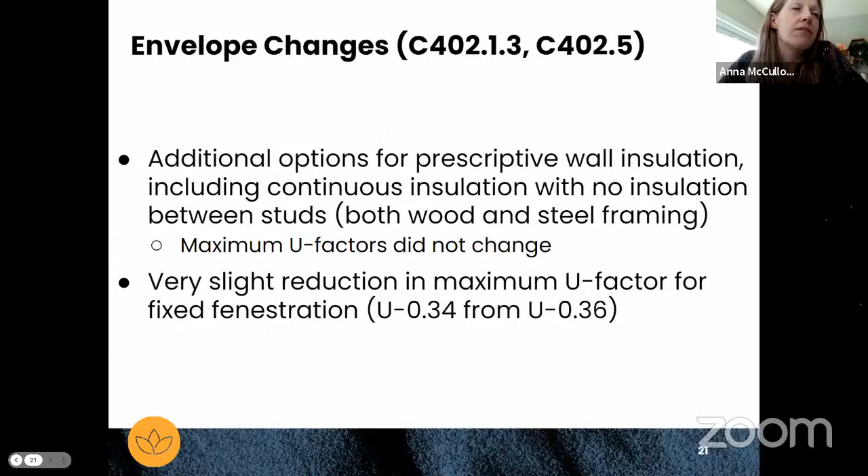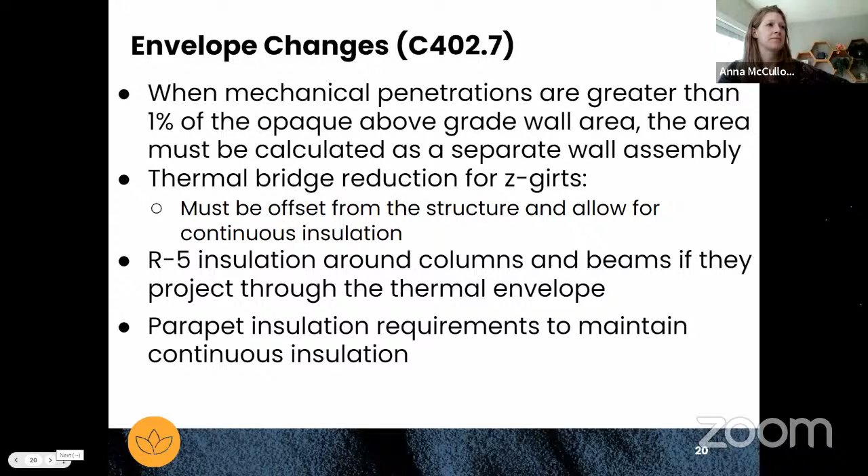We got a question in the chat: would the 1% be calculated on just the individual wall area or the entire exterior wall area of all floors? It is the entire exterior envelope, so roof, walls, floors. Yeah, just clarifying, making sure I'm understanding correctly, air leakage testing, i.e. a blower door test, is going to be required for commercial buildings. Yes.

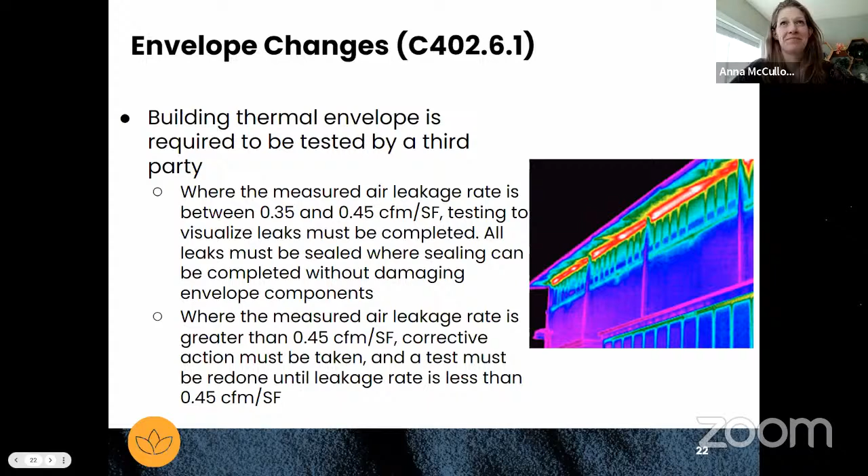Okay, thank you. That was what I had, oh, there is one more. If we have a balcony or floor deck that penetrates the thermal envelope, in some cases we'll see that the concrete floor deck just penetrates right on through the thermal envelope, with no attempts to mitigate that thermal bridge. That is not allowed to happen unless an approved thermal break device of at least R10 is installed. That'll be an increased cost to try and really reduce that large thermal bridge.

Okay, that was what I had on envelope. Is there anything else you guys wanted, any concerns you had? I don't know if anybody's read through the 2024. Okay, we'll keep moving. Oh, Tim.

Yeah, thank you. We see this quite often with podium or concrete podium type construction, and I think that's why this is finally making it into the code. But I've yet to see a detail to do that thermal break through there, so I think the designers are going to go through an area weighted U factor. I would be interested in this meeting to have somebody send me an example of that, which would be helpful for me with my plan review.

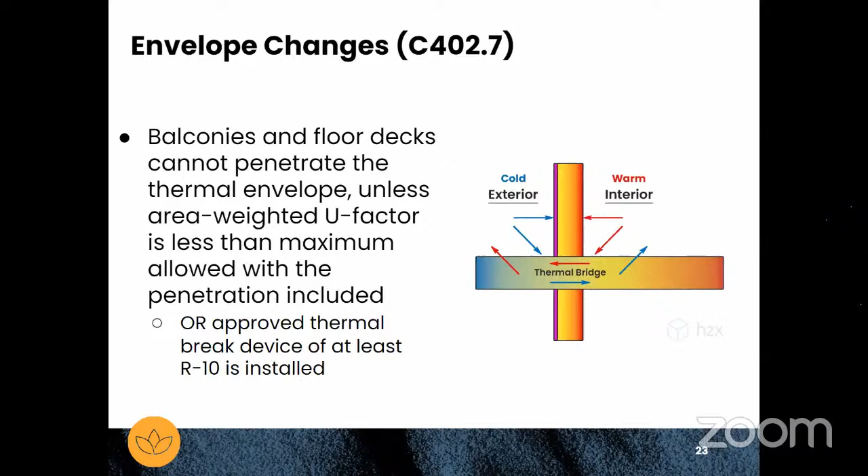Yeah, I did. Are any of these, just kind of knowing my experience with the residential code, envelope measures tend to be among the most contentious. Are any of these elements still contentious, or are these what are still holding up the commercial code from moving from draft to final form? I guess what I'm trying to determine is which of these are still points of contention within the commercial code, so we can figure out which ones we need to maybe pay close attention to before the code becomes finalized.

Yeah, so go ahead Adam, if you have any additional information about this. My understanding is that the appeals are really centered around section C406 for the most part, and that if the building does not have heat pump heating, there are additional points that are required to show compliance with section C406.

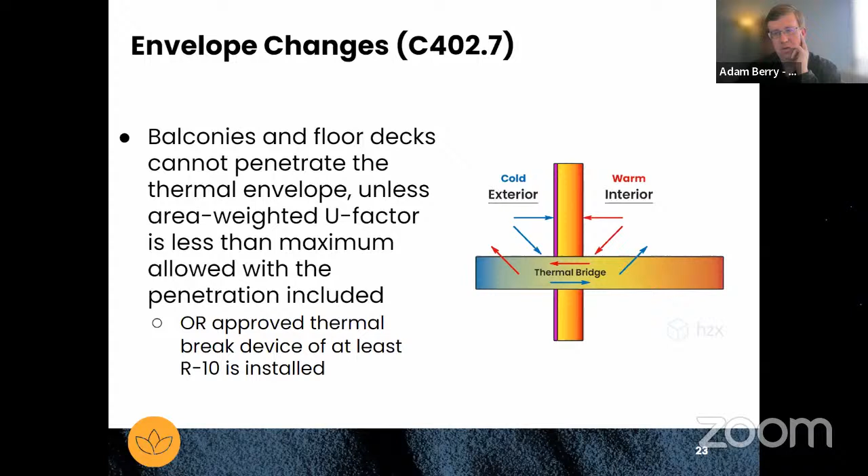Yeah, so that was one of the big ones. The other big one for the appeals was about the readiness provisions that the ICC included in the base code, which I think are not particularly relevant here, given that we already have many of these readiness provisions in our own model code that you all created last year. But I think that was the other big point of contention.

Great. And then Ron, did you have a question?

Oh, I was just going to mention that there are some proprietary products out there that deal specifically with this thermal break issue for concretes. Yeah, I could put one in the chat. Oh, great. Thanks, Ron.

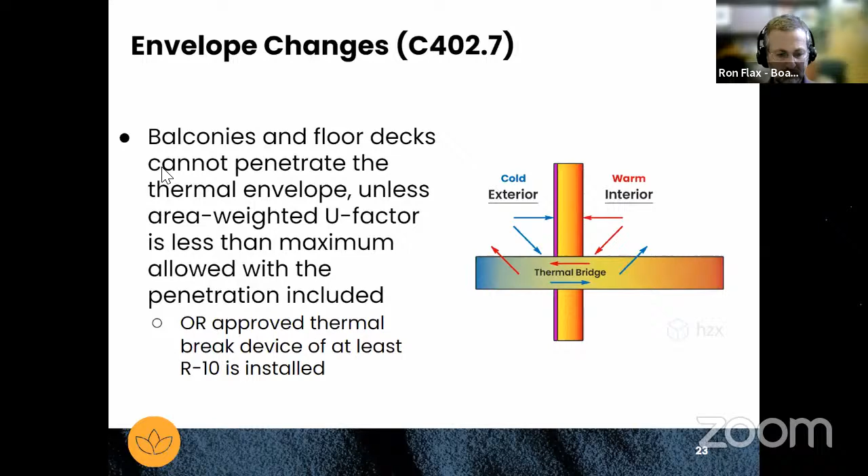HVAC didn't have as many changes as I expected, so that's great. There is now an option to show compliance with section C403, the HVAC section, using the total system performance ratio. This is now section C409, but we're not going to walk through it because it's a long calculation. Essentially this uses the average efficiency of your HVAC system to show you're compliant with all of those tables that show the efficiency required for your different HVAC systems. So this allows you to basically say my building on average meets the requirements of the IECC, rather than looking at every single piece of equipment.

An update as well: buildings greater than 100,000 square feet are required to have fault detection and diagnostics. This could trigger a building automation system for a building that otherwise may not have had one. Under the 2021 IECC, fault detection and diagnostics were required for systems that serve a square footage of 100,000 square feet or greater, so think about a really large office building with central heating hot water. Now, for your building, if it is 100,000 square feet or greater, you are required to have fault detection and diagnostics on your systems. So just some additional monitoring to make sure everything's operating as it should be.

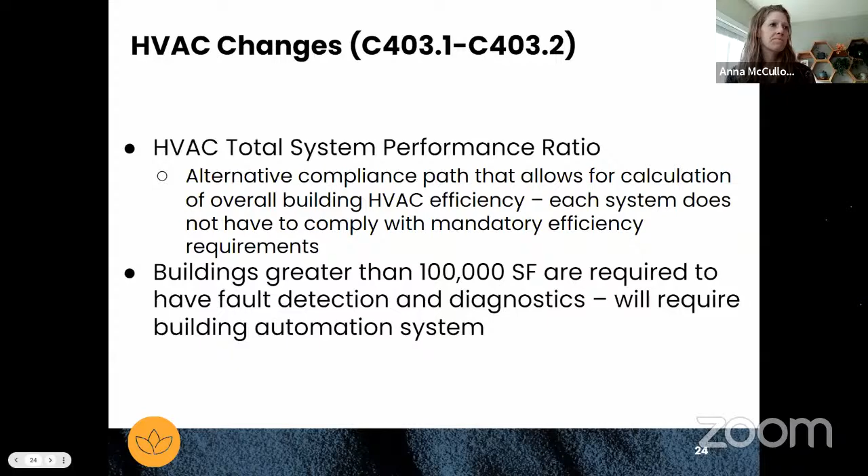Slight increase in minimum efficiencies for some types of equipment, mostly focusing around heat pumps. There was a little bit of rework around all of those efficiency tables for inside the US and outside the US, and some clarifications within the tables themselves, but overall pretty minor changes to the required efficiencies of new HVAC equipment under the 2024.

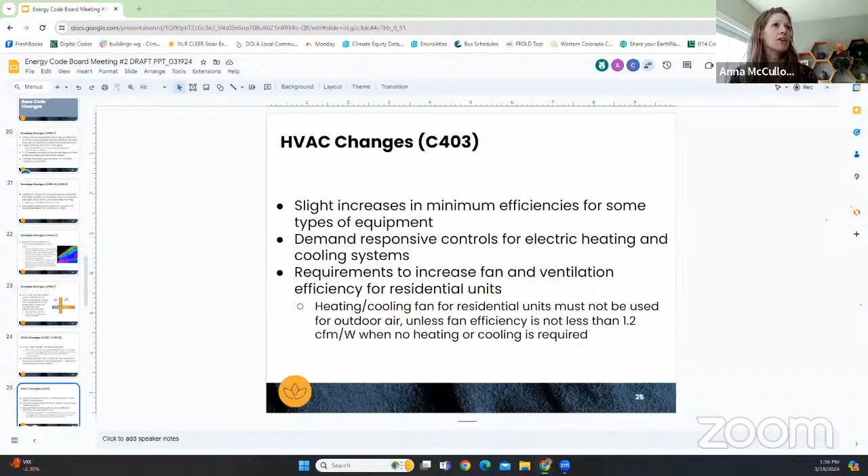A big change is the demand responsive controls for electric heating and cooling systems. So now if you have a heat pump, or a rooftop unit with an electric heating coil, you're going to be required to have demand responsive controls that can be used to reduce your peak energy use upon a call from the utility.

There were also significant changes to the requirements for residential units under the commercial code, including increasing fan and ventilation efficiency. Also, this was an interesting one: if you think about a residential unit, you have outdoor air ducted to the return of your fan coil unit. That central fan in your fan coil unit cannot be used for ventilation. So your outdoor air has to be provided separately to the unit, and you can't be using that fan coil unit's central fan for constant supply air just to ventilate, unless the fan meets the efficiency requirement listed there.

Tim: So I know the commercial portion of this, when it talks about residential, would, I'm sure, still be applying to the 4-story or taller. Yes. And at 3-story or less, there are going to possibly, hopefully, maybe, have somewhat the same type of changes. I guess maybe you'll touch on that. You get residential next meeting. I don't want to spoil the surprise. But yeah, so this is all 4 stories and above. Thanks for that clarification.

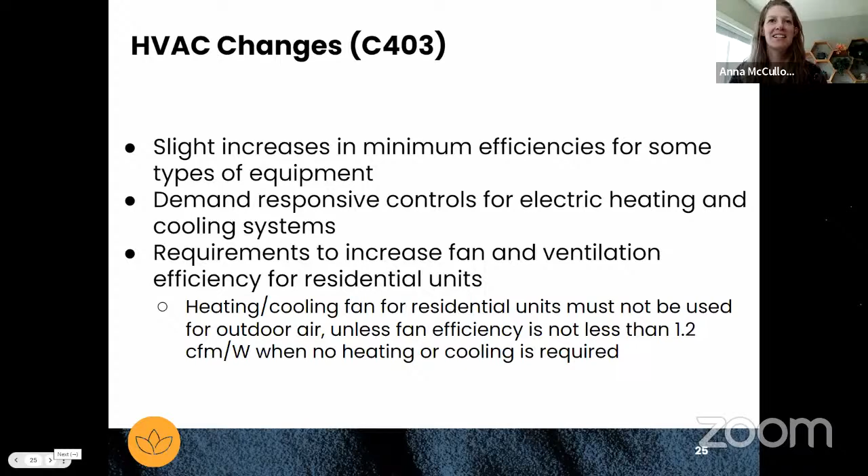And that was it for HVAC. Service water heating: we have a slight increase in efficiency for gas water heaters. I think we went to 84% from 82. There was some clarification around making sure that if we have central domestic hot water, we do not have constant pumping going on; the circulation system shuts down when there's no call for domestic hot water. And then again, demand responsive water heating.

So you have to have controls, or if you have an electric water heater, controls that provide the capability for the utility to reduce your peak demand. That's it. Tim: Quick question on that first bullet point - so the efficiency for gas water heaters, would that be in line with the minimums required by the feds, or was that in consulting with the DOE or whoever makes those up? That's a good question. I'll have to look that up and get back to you.

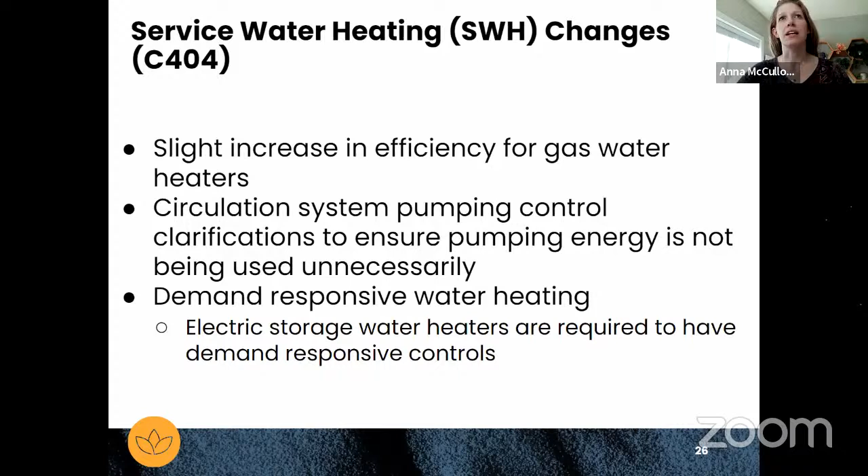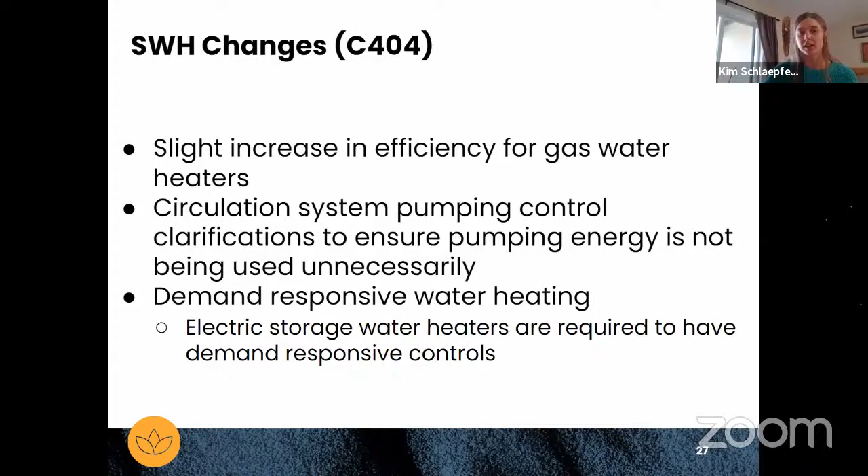Go to the next slide. I did. Oh, I'm sorry. I thought I did. There we go. I was like, oh, there might be just 2 slides that read the same. I swear I hit next. Okay, back to you. I'm sorry about that.

Okay, big changes to the power and lighting section of the code. This is where it gets really interesting. There are updated lighting control strategies, including daylight requirements. The specific wattage targets within daylight zones have been halved, so we're going to see a lot more daylight controls required for buildings with low lighting power densities.

There is a requirement for demand responsive lighting controls. There has to be an 80% reduction in your lighting power upon signal receipt from the utility to reduce your peak lighting use or peak energy use.

Reduced lighting power densities, both interior and exterior. In the interior space types, we saw about, on average, a 5% reduction. Some spaces actually had their allowable lighting power densities increased, and some were really decreased, working out to about a 5% average. The exterior lighting power reduction was about 35%.

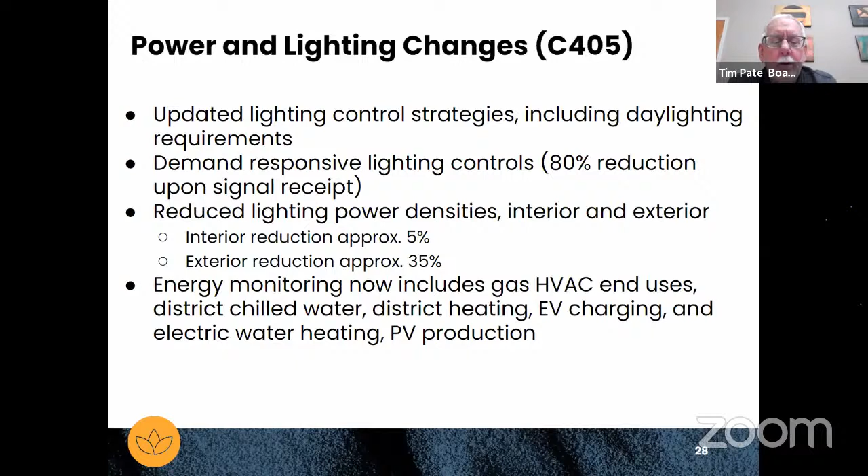Tim: Sorry for the question, but this bullet point on energy monitoring, when we move towards possibly adopting this part of the code, I wonder how that's going to interplay with the electric ready provisions we already just did. It just says electric ready with what we're enforcing now, but how that might overlay into this bullet point is a point of discussion for when we move further along, to see how those two would work. Yeah, that's a great point.

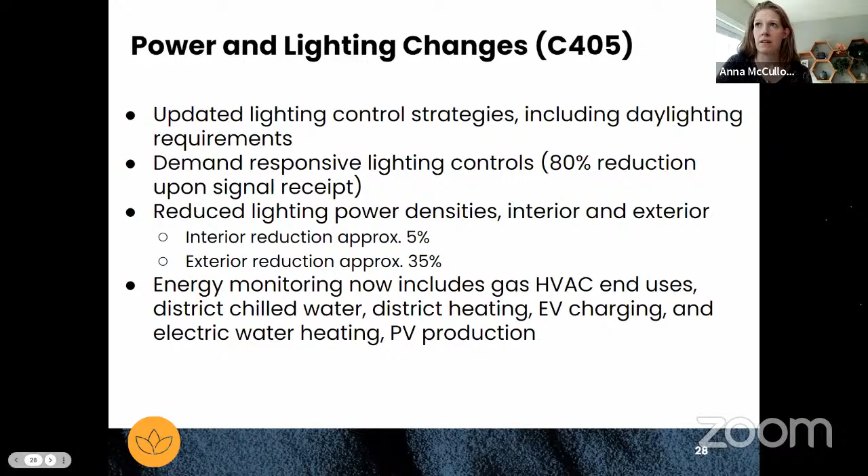There also now is a requirement for EV charging. We'll have to do some comparison, like Tim was saying, around requirements for EV charging. There are specific definitions around EV capable, EV ready, and EVSE spaces, what percentage of those spaces are required based on occupancy type, and a note that the electrical system must be sized to handle all potential EV charging loads.

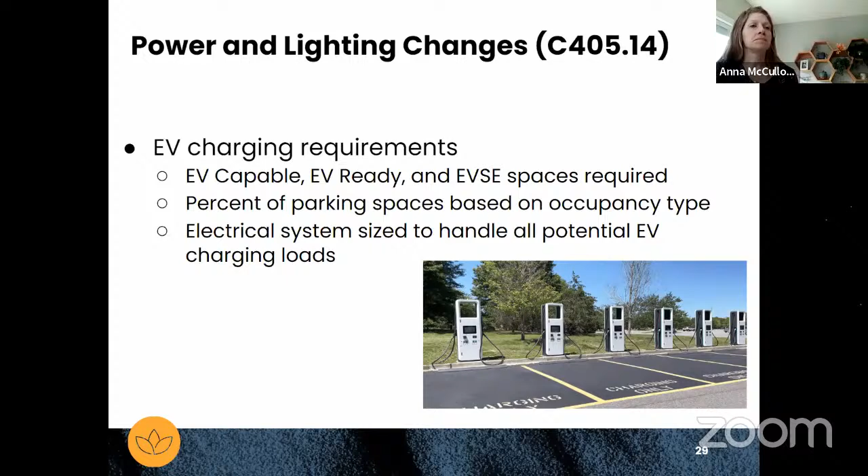Go ahead, Carolyn. Sorry, I just wanted to name that for Kim and team, I think it would be great to get a comparison on how this compares to what we adopted as our state minimum code. I know we largely leaned on the proposal that was part of the 2024 package, but if we can really narrow in on where the discrepancies or changes are, that would be great. Yeah Carolyn, I think within our schedule for future down the line, as we revisit the EV ready, solar ready, and electric ready provisions, there will definitely be some analysis of differences, and discussion about whether we want to maintain the state's approach as developed, or if there are benefits to going with the 2024 code or somewhere in between. That will definitely be part of that conversation. Perfect, thanks, great. Yeah, I think that was what I had to say about this. Carolyn, you took care of it for me.

So then, buildings 5,000 square feet and greater are now required, and it's mandatory to have on-site renewables at 0.75 watts per square foot of gross conditioned floor area, not to exceed the combined square footage of the 3 largest floors. So picturing a stepped building and making sure that we're calculating that correctly. There are exceptions for roof terraces, mechanical equipment, and vegetated space.

So if the roof of your entire building is like a farm or green space—probably not a working farm—you would have to comply with some of these other options. There's also an exception for shading and potential production, so if you live somewhere that isn't going to get sun, or you're a small building right next to a tower and won't get direct sun on your PV, then you do not have to provide that on-site renewables.

They have these other options. You can purchase off-site renewables, but they must be within your local utility or distribution entity with direct connection to the building site—pretty difficult to meet. And there's this subpoint: all RECs for on-site and off-site renewables must be retired by or on behalf of the building, so you can't sell the RECs of your on-site PV.

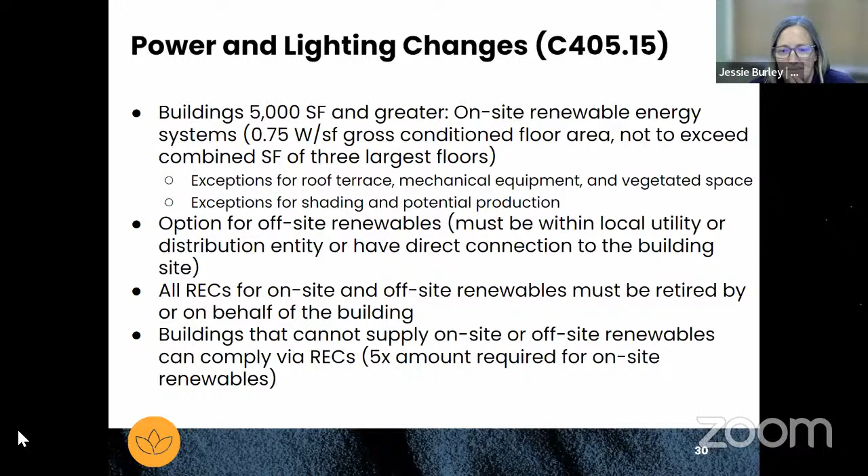And if I may, Jesse, as you were raising your hand, I was kind of writing down the same notes, and the one that jumped out to me was the offsite renewables bullet point on here.

My suggestion is the board take that into consideration. When we get closer to the time we're talking about these specific provisions, maybe we can generate a couple specific questions for me that I can look at and compare to current law and practice, and take back to my team who works at the PUC quite a bit.

I have a question for you. I didn't see who that was, but if you're talking to me, go ahead. Great, I'll wait till I'm called on. Oh sorry, I think you're up next, Kristen. Go for it.

The issue I see here is the additionality question. A lot of utilities within the state offer incentives for renewables, but part of the reason they're able to do that is because the state has authorized them to use ratepayer money for rebates and incentives, because customers are essentially going above and beyond what's required. So now the question would be, if a new build has to have these renewables, are they still eligible for those types of incentives? That's one example of the interplay between code requirements and utility programs.

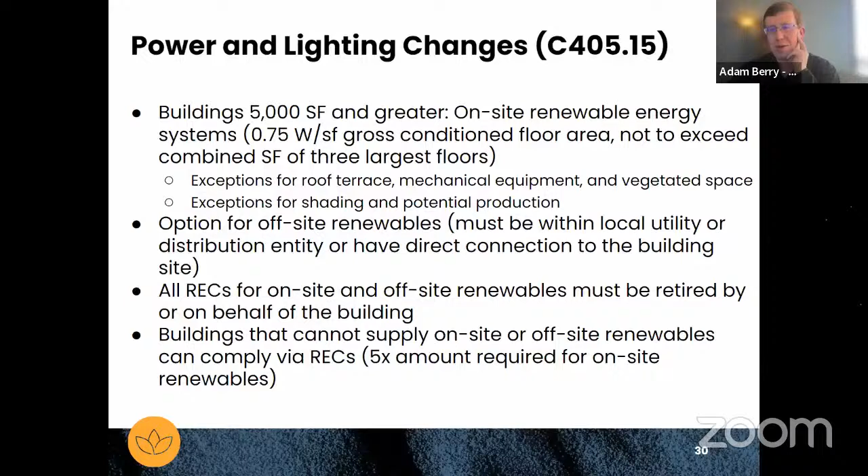Now, what constitutes more or less stringent is something we might need to wrestle with. I think it would be pretty justifiable to say removing the requirement altogether is less stringent. So what you're asking is, can we remove it entirely, not just weaken it? I think the answer is yes, technically that is allowed by the statute. Thank you, just wanted to clarify that, since I think this one has a lot of complexity.

I'll also name the issue that we're developing this code in a statewide construct as we know it today, which is changing and won't be the same by 2030. We could get hung up trying to talk about utility allowances, considerations, and incentives, acknowledging we're building in regulated and non-regulated utility spaces. There's likely a point where we just need to acknowledge that and make the best decision in terms of what's an enforceable building code.

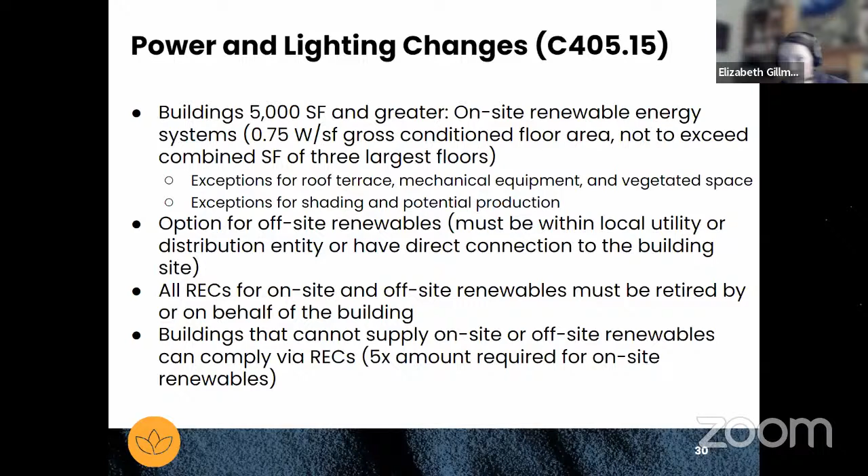Thanks, Carolyn. Elizabeth? I wanted to chime in and ask Rob some questions about the Xcel incentives also. I know you've probably experienced this for jurisdictions that already have EV charging mandated, that did take away the rebates. Xcel does not rebate anything that is required by code, and that's a big deal because it made everything a lot more expensive. We need to keep that in mind, especially when talking about cost effectiveness and payback, since a lot of those calculations include incentives.

There's a loophole if you make something an option. For example, looking at these four bullets, instead of saying you have to do solar, if we say you could do on-site solar or you could do RECs, the magic word for Xcel is usually optional. So if you give people different options to comply with the intent, you're keeping the door open for incentives and rebates. Keep that in mind — as soon as we're not mandating something, it is still rebatable.

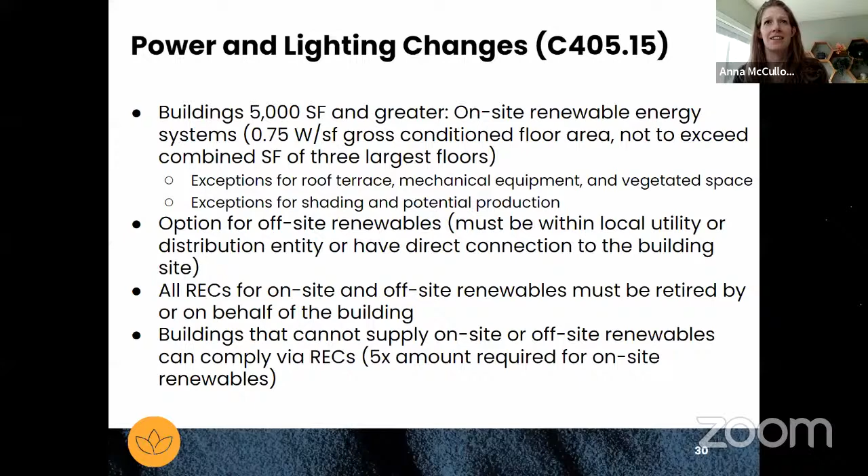This one threw me for a loop more than the on-site PV one did. I'm surprised. All right, any questions on this or concerns?

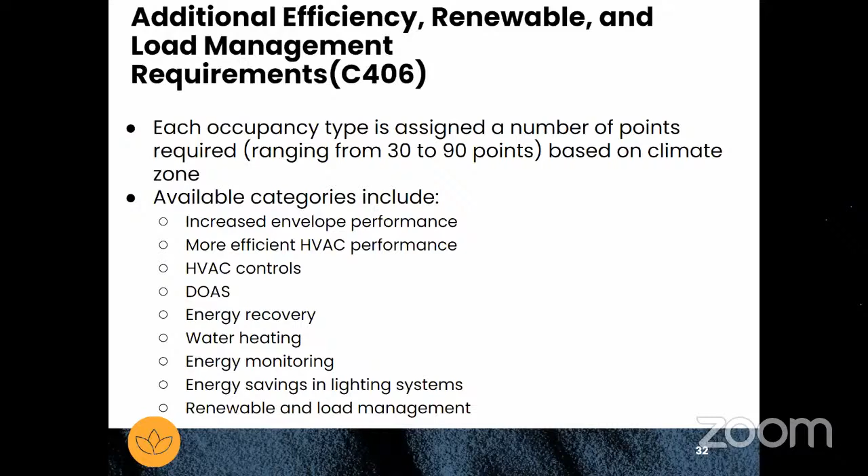Do you mean what do they have to do to achieve points? No, not what they have to do to achieve points. I think on the res side, the envelope backstop is IECC 2009, and then you can use the additional efficiency requirements to achieve code compliance with 21.

Is that analogous to the commercial side? Because I don't know it as well. And if so, what is that?

So they use a UA calculation. Basically the average U factor of your thermal envelope times the different areas of the building. You have to show a UA reduction of 15% to show additional energy efficiency above those prescriptive values, those U factors listed in the base code.

Okay, thank you. There also are points available under reduced air leakage, so testing to show that the building operates with less infiltration. Go ahead, Tim.

Yeah, sorry. So did these numbers, the minimum requirements in C406, go up from what the base number required in the 21? I just pulled my book open. It looks like you need a minimum total of 10 credits. So did that base number go up? Yes, yes.

It went higher based on the type of occupancy, or did this generally go up? Yeah, so I can, if you want, Kim, I can share my screen here. I didn't want to just... oh, it's disabled. Adam, I think you'll just have to... you should be able to now. Okay.

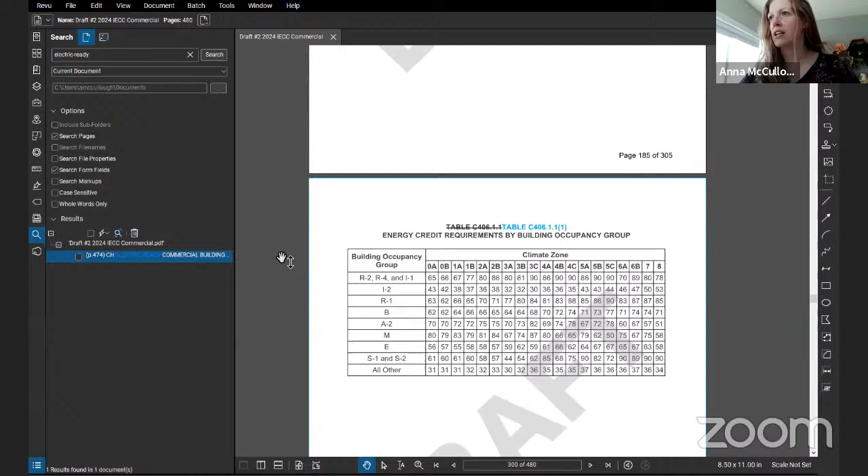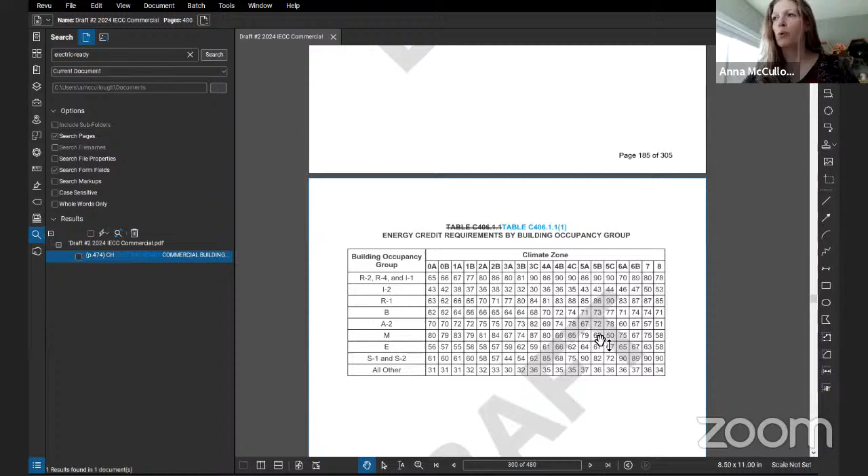So you're looking at the IECC, yeah? So within this section, we have the energy credit requirements by building occupancy group. So based on your building occupancy, for example, climate zone 5B, we have these point totals that you need to meet. There are also base requirements, and we'll get to it on the next slide.

Sorry, there's limits to the energy efficiency credits that you can take for renewables on site. But there are base requirements, and I'm going to have to scroll. These tables get... I may have passed it and I may have not. Sorry, there's a lot of tables. I'll stop sharing, hold on one second so you guys don't have to watch me scroll. It's horrible, I hate watching people scroll.

There are also base points that every project needs to meet, no matter their compliance path. So if you are complying with the code via section C407 and energy model, you will also have to show that you meet a certain number of credits, if I can find the table.

And I think one question that might also help to illuminate a little bit of what Tim is asking about is that they also completely redid the approach to how points are being assigned per measure as well. So Tim, it's not like we just went from 10 credits required to 90 credits required. There's also a complete revamp of how those credits are assigned for each of those additional measures. Correct. It's not like you're suddenly having nine times more credits than you had before.

Correct. I'm sure somewhere along the line there'll be an analysis to show that, say for a B occupancy, what that base amount is going to increase, because I think what I've seen so far is probably going to be one of the bigger impacts on cost. Yeah, absolutely, thanks.

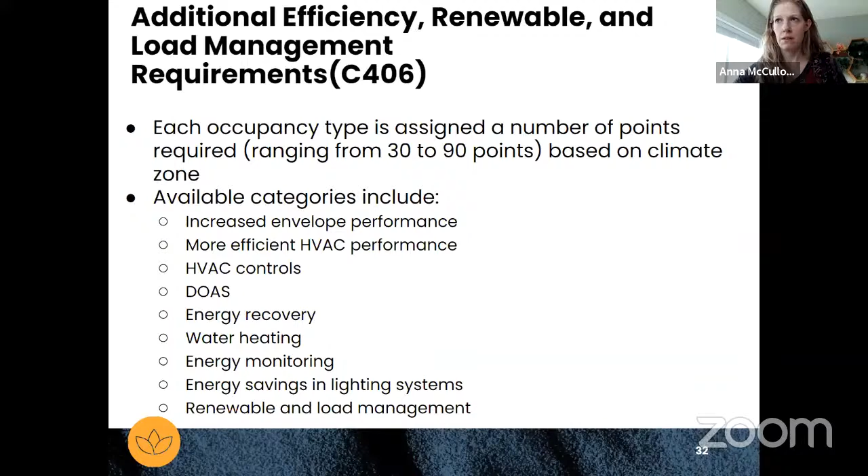So in section C407, like I said, now rather than just saying we need to see 20% annual energy cost savings above the baseline, we now have to see that percentage will change based on the number of points that are required in section C406. So for example, a group R building, group R2, it would require 90 points under section C406, so they would require within this calculation 28% annual energy cost savings.

A building like I2 only requires 43 points under section C406, so I think it's closer to 17% annual energy cost savings, but I'd have to recalculate it. So that annual energy cost savings required for code compliance under the performance pathway is going to shift based on the occupancy type.

If you have multiple occupancy types in your building, oh thanks Adam, you're creating a weighted average. And then there are additional renewable and load management credit requirements that are mandatory. We have to show a certain number of points based on, again, occupancy and climate zone, even if you are complying with section C407 to show additional energy efficiency.

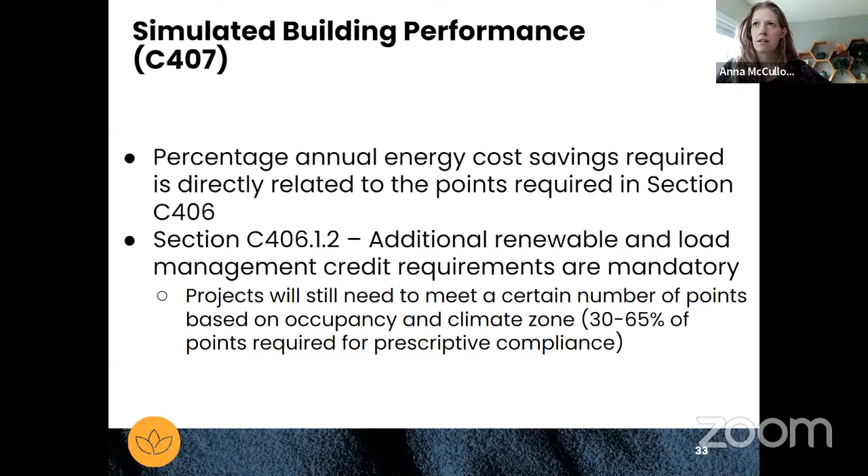Commissioning, there was only one change: clarifications around system exemptions for residential units under the commercial code.

And that was it. So then what we did, most importantly, was take our examples—technically 4 buildings: an all-electric office that would have complied under the 2021 IECC, a mixed fuel office, an all-electric multifamily building, and a mixed fuel multifamily building. We updated those energy models to show compliance with the 2024 IECC. We also took a stab at calculating the estimated first cost, and I did it on a per square foot basis because things get a little wonky if we're talking about specific examples.

For offices, we're seeing a slightly higher increase in first costs at around $22 a square foot, and multifamily buildings are around $15 a square foot.

The estimated annual energy cost reduction is close to 30 cents a square foot for both office buildings, and close to $0.19 a square foot for multifamily buildings. We are seeing slight EUI reductions: 22% for the all-electric office, 15% for the mixed fuel, 26% for the all-electric multifamily, and 11% for the mixed fuel multifamily.

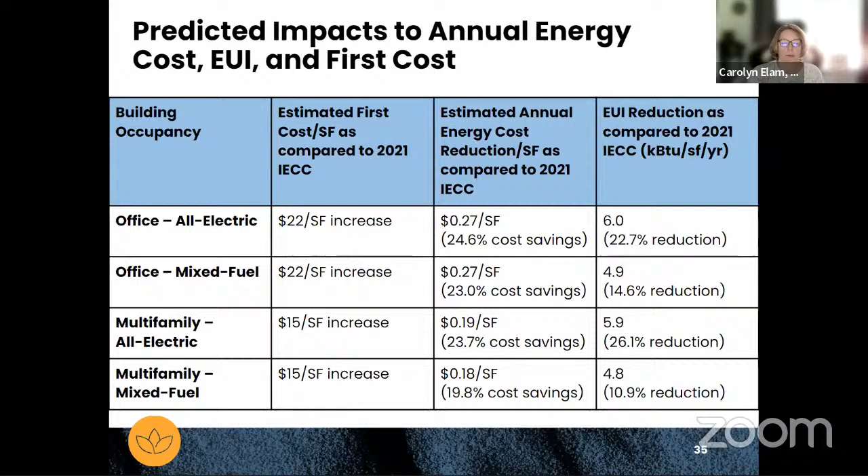Just to be clear, you're talking about gas hookup, gas infrastructure and hookups, and yeah, okay. Yeah, so meter sets and plumbing and ducting costs. We certainly have all seen those numbers, but I think we need to bring that into this conversation to talk about what we want to put forward. And I think those are just really important to understand where the savings come from.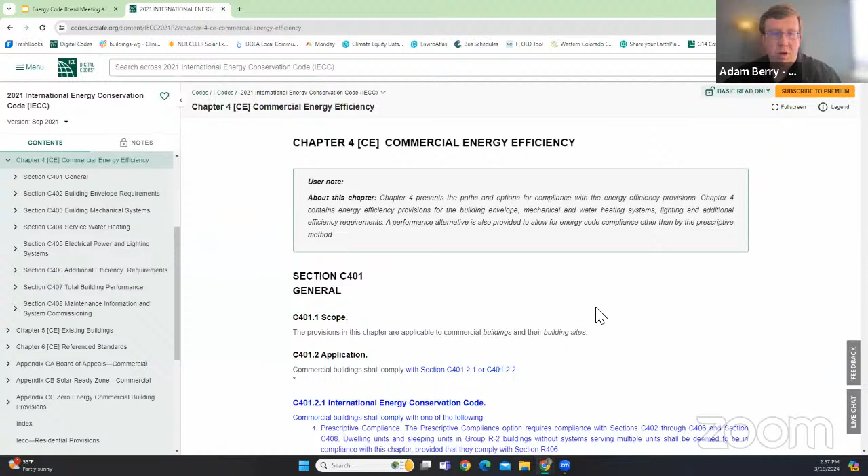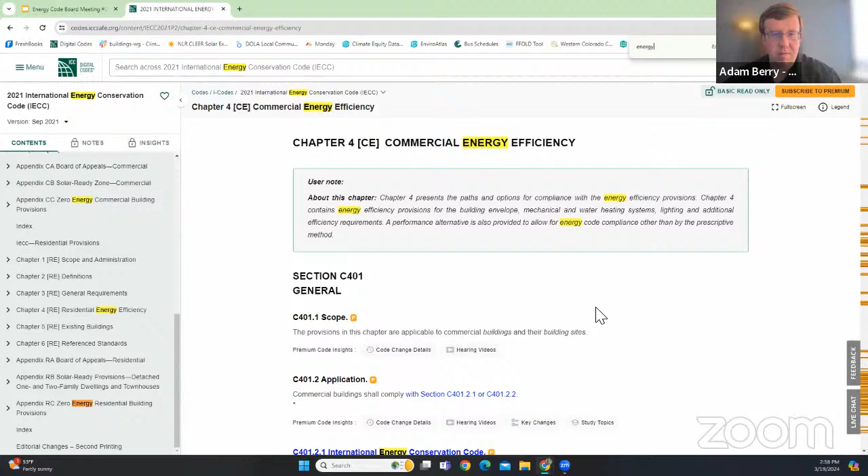But I just wanted to share that I'm not ignoring your suggestion, Tim. We're just trying to think through what that might look like. Kim's here giving a brief overview of what that online version of the code looks like. There is not currently an online version of the code for 2024, since 2024 is not final, but we anticipate ICC would be more likely to get the online version out probably more quickly than the official code books anyway. So that's kind of where we landed with that.

If anyone feels there is a huge challenge with using this online version and would like to express that to us, either now or privately over email, please feel free to do that, and we will figure out a way to accommodate that. I think we've landed on using the online version as probably the most effective and cost effective option for the Energy Office, which has no money to pay for code books. So if anyone wants to share a challenge with that, or has strong resistance, please feel free to email us afterwards and we can try to figure out a solution for you.

Awesome, thanks Adam, and thank you Tim for dropping the link. Just to quickly share, you guys can easily search through the different codes using the search bar, and the primary navigation happens in the left-hand column here. Using Control F you can at least do a search through the code page you have up. If I look for energy and I'm in chapter 4, it's not going to pull up energy references in a different chapter I don't have up. But if anyone has technical concerns or wants to do a review of this, as Adam shared, we're happy to carve out some meeting time to make sure you all feel comfortable using that resource.